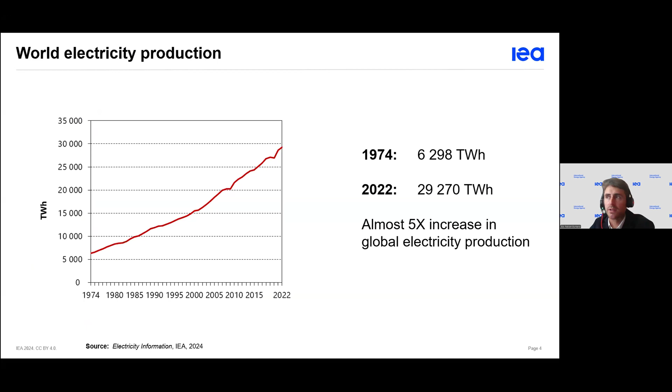Let's start with a small quiz where you can also answer in Menti. What is the main fuel used for electricity production in the world in 2022? For this, I invite you to go to Menti with the code 49411893 to answer this question. We have touched upon this topic already in some other presentations, and now I invite you to see what you have learned. What is the main fuel used for electricity production in the world in 2022? Natural gas, oil, solar and wind, coal, hydro, or biofuels?

I can see many answers coming in. Most are in favor of coal. There's also an answer for natural gas and hydro. The big majority thinks that coal was the main fuel used for electricity generation in 2022. I think we have a clear winner. It is coal. You can still start voting, but coal is the correct answer, still in 2022.

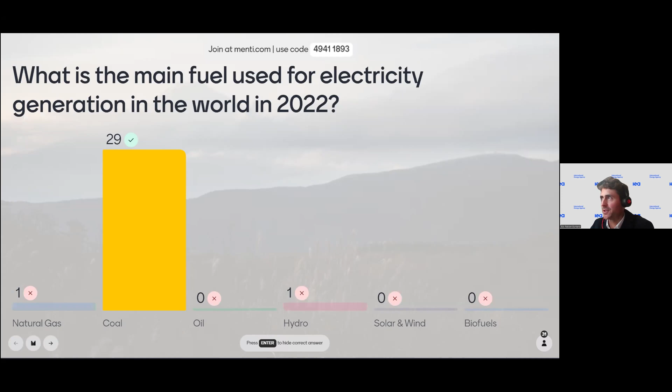Okay, so over this 50-year period almost, since 1974, the mix of fuels used to generate electricity changed. For instance, if we look at the share of electricity production from oil, shaded in dark blue, you will see that oil has fallen from about 25% of production in 1974 to around 3% now in 2022. Similarly, the share of hydro has fallen from about 23% to 17%, as many of the suitable large-scale sites have already been dammed. By contrast, the share of production from natural gas, shaded in light blue, has increased significantly, rising from about 12% to almost 24% of generation.

There's also been a noticeable increase in production from nuclear power, with the share rising from 4% in 1974 to 13% in 2010. However, since then, the share has declined slightly, in particular following the accident at Fukushima nuclear plant in 2011. During this time, you will notice that coal still remains the main fuel used for power generation, as we found out before, with its share changing little between 1974 and 2020. One of the reasons for coal's enduring popularity is still its cost advantages over other fuels.

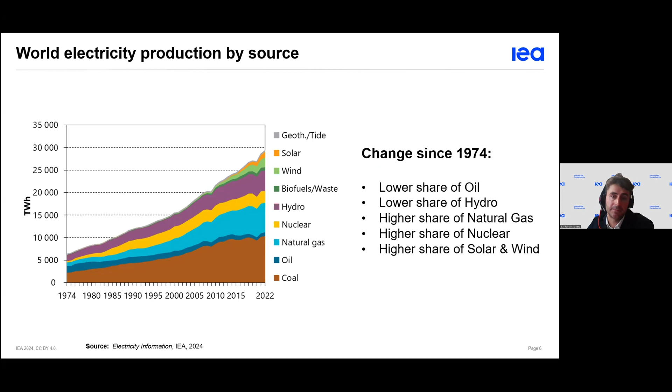However, on the emissions front, there's some good news. If you look at the share of electricity output from solar and wind, shaded in orange and light green, you will see that although the output from these renewable sources is still relatively small, their share has been steadily increasing in recent years as production costs have fallen. So in summary, compared with 1974, the electricity mix has a lower share of oil and hydro, a higher share of natural gas, nuclear, and solar and wind. The share of coal is still approximately constant.

Now let's look at the data for electricity generation in 2022. As mentioned, coal is the dominant fuel, followed by natural gas, which provides just on a quarter of total output. In total, almost two-thirds of all electricity production comes from combustible fuels, so coal, oil, gas, biofuels, waste. The remaining third is produced by non-emitting sources such as nuclear, hydro, solar, wind, but also geothermal. As mentioned, the share from solar and wind is still relatively small, but has been steadily growing over recent years, with the combined share of solar and wind now over three times that of oil.

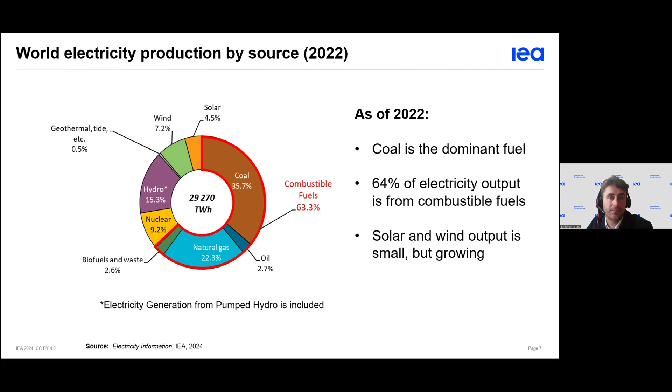Now let's look at the electricity production by region. Here you can see a graph of electricity production for the OECD and non-OECD countries. OECD is the dark black line, and all the other countries are shown here in different colors. As you can see, electricity production in non-OECD countries has grown much faster than in OECD countries over the past 20 years. As a result, production in non-OECD countries surpassed that of OECD countries in 2011.

Since then, the electricity production in non-OECD countries has continued to increase, while production in OECD countries has plateaued almost. As of 2022, non-OECD countries' share of production stands at around 60% compared with 28% in 1974. It's a similar graph, just with a line for the non-OECD countries here shown in red.

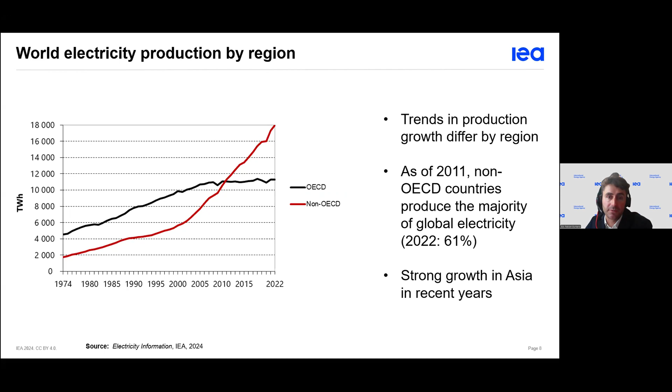Now, let's look at the electricity consumption by sector. Firstly, you will notice that consumption has increased almost fivefold, growing from 5,000 terawatt hours in 1974 to almost 25,000 terawatt hours in 2022. If you remember a few slides back, production has also increased almost fivefold, so it makes sense that consumption would increase by a similar amount.

However, the numbers are different. If you remember from the production graph, production was almost 30,000 terawatt hours, and here you can see it's 25,000 terawatt hours, not 30,000. The reason for that is the transmission and distribution losses and also the energy industry's own use.

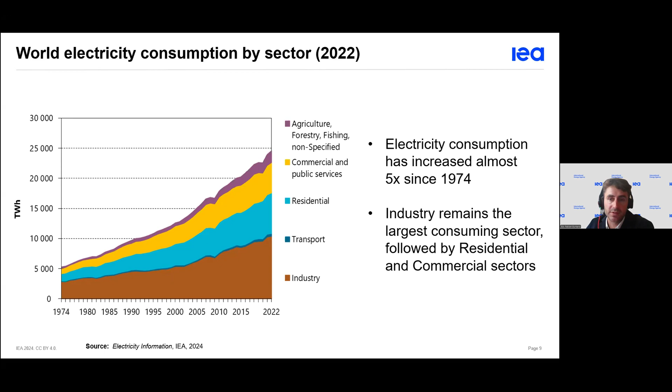Looking at the consumption sector, industry is the largest consuming sector. However, its share of consumption has declined over time as restructuring and improvements in energy efficiency, particularly in OECD countries, have seen electricity demand in industry rise at a lower rate than in other sectors. However, this is a graph for the world, and on the next slide you will see consumption patterns in OECD and non-OECD differ.

If we compare the sectoral consumption in the OECD on the left-hand side with the non-OECD countries on the right, we can see some differences. In the OECD, three sectors - industry, residential, and commercial and public services - each consume roughly around a third, 30 to 32%, of electricity demand. By contrast, in non-OECD countries as a whole, industry represents almost half of total electricity demand. There are many reasons for these differences: the structure of the respective economies, income levels, and others.

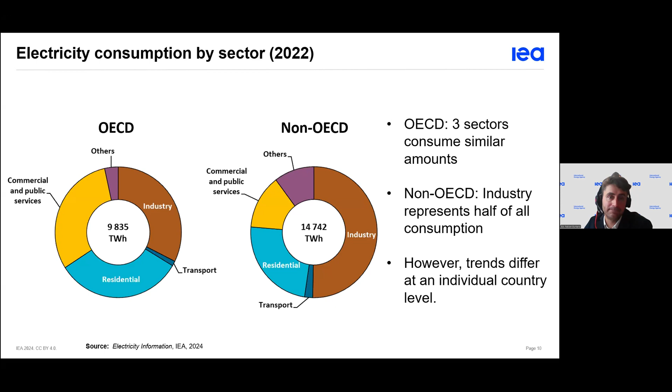However, of course, trends differ again at an individual country level. So that's it from the small history and the trends. Let's start with the concepts.

Firstly, let's look at the sources of electricity. Electricity is produced as both primary and secondary energy. Primary electricity is obtained from natural sources such as hydro, solar photovoltaic, and others. Secondary electricity is obtained from the heat generated by burning combustible fuels, from geothermal heat, and solar thermal heat.

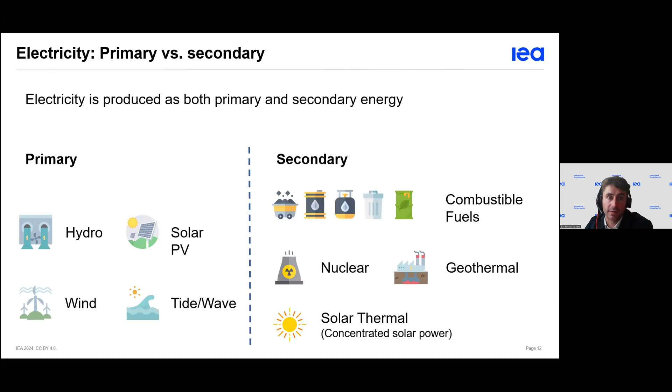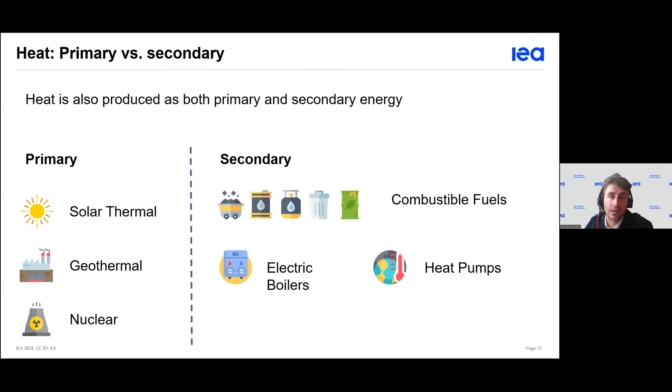Similarly, heat can be used as primary and secondary energy. Primary heat is obtained from natural sources such as solar thermal, geothermal, as well as from fission in nuclear reactors. Secondary heat is obtained by burning combustible fuels and from transforming electricity into heat in electric boilers, or by capturing it from low temperature sources using heat pumps, for instance.

Now, let's look at the producers. Electricity and heat producers can be divided into two broad categories: main activity producers and auto producers. Main activity producers generate electricity and heat for third parties as their primary activity. The main purpose of the facility is to generate electricity or heat. For instance, a nuclear power plant is a good example of a main activity producer.

By contrast, auto producers generate electricity or heat only as a secondary activity in support of the primary activity. For instance, a large chemical manufacturing facility may have an on-site power plant to generate electricity and heat, which is used in the production process. Some of this electricity and heat may also be sold. However, the main purpose of the facility is to produce chemicals, not to produce electricity and heat. Therefore, this would be classified as an auto producer.

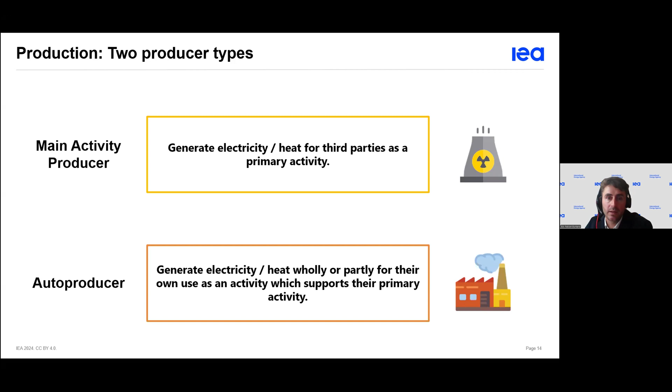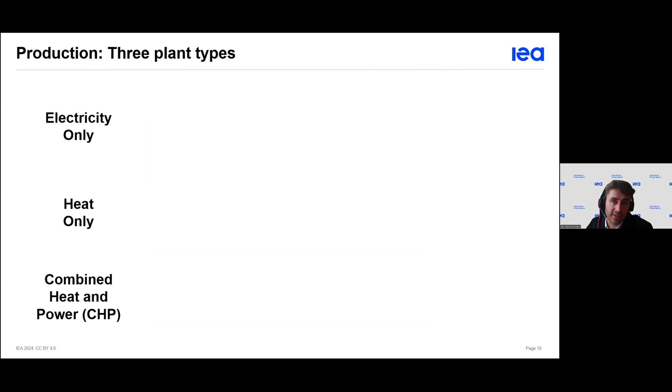Now, let's look at the plant types. Electricity and heat producers can be further distinguished by the type of plant that is operating. There are three categories: electricity-only plants, which only produce electricity; heat-only plants, which only produce heat; and combined heat and power plants, also named CHP plants, which can generate both electricity and heat in a combined process. This is also known as cogeneration.

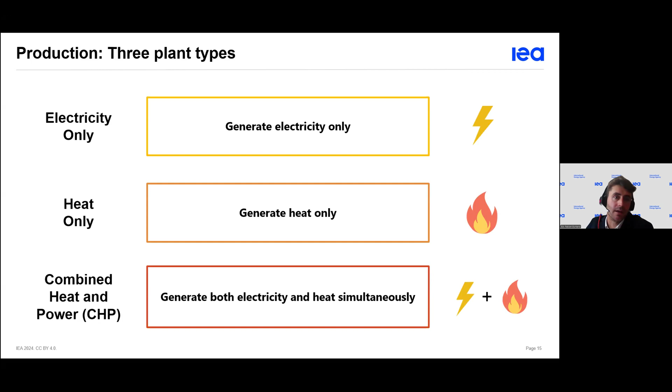Some more reporting conventions now used in the reporting of electricity and heat statistics. For main activity producers, the convention is very simple: all production of electricity and heat is reported. However, for auto producers, there are some specific conventions for heat. This is because auto producers are also industrial consumers that use fuel to power their processes.

For auto producers, all electricity is reported in the electricity and heat questionnaire. However, only the amounts of heat sold are reported; amounts of heat generated for own use on-site are not reported. Similarly, when reporting the associated fuel inputs to electricity and heat production, for heat, only the amounts of fuel input associated with heat sold are reported.

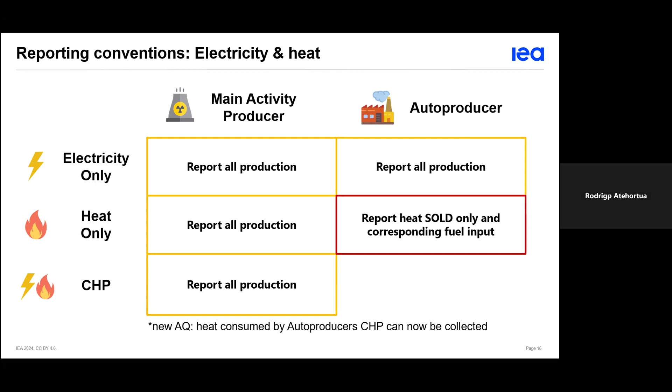A small note on that: for the new annual questionnaire, auto-consumed heat by auto producer CHP can now be collected.

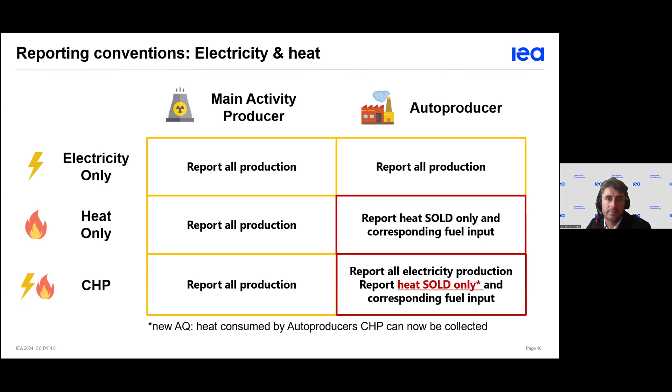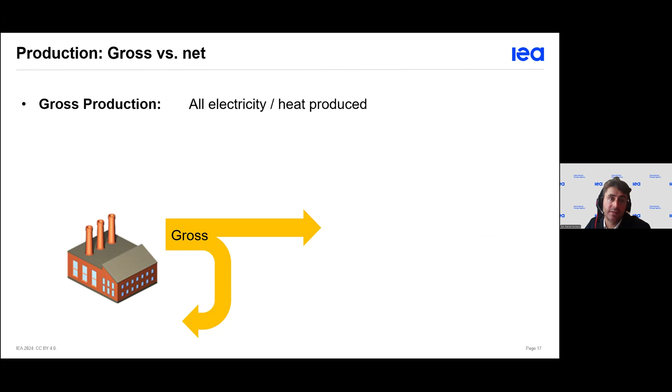Another important concept is the distinction between gross and net production. Gross production refers to the total output of electricity or heat generated in a facility before any is used. However, not all of this is used for productive purposes beyond the power plant. Some of the electricity and heat generated is used on-site for lighting, heating, or to support plant operations. This is referred to as own use.

The remainder left over after subtracting the own use is the net production. However, remember that for auto producers, production only refers to heat sold. Which brings us to the next concept: the convention for reporting of own use data.

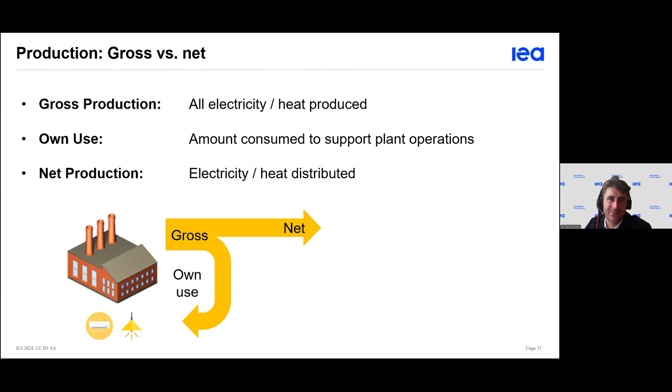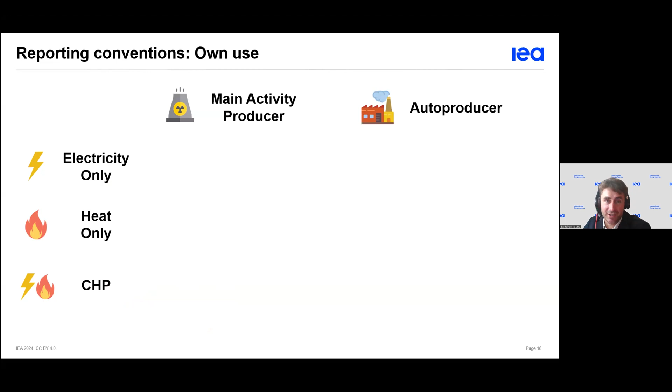If you recall, for autoproducers, we only report the amount of heat sold, not the total heat production. Therefore, we cannot report the total amount of heat used for own use, as this would not align with the reported production figures. So we need to make an assumption.

For main activity producers and for all production of electricity, the situation is simple: net production equals gross production minus own use, as described on the previous slide. However, for auto production of heat, we assume that gross production equals net production and there is no own use. This is because for auto production of heat, it's difficult to distinguish between heat used for own use and that used simply for plant operations. I hope this was clear.

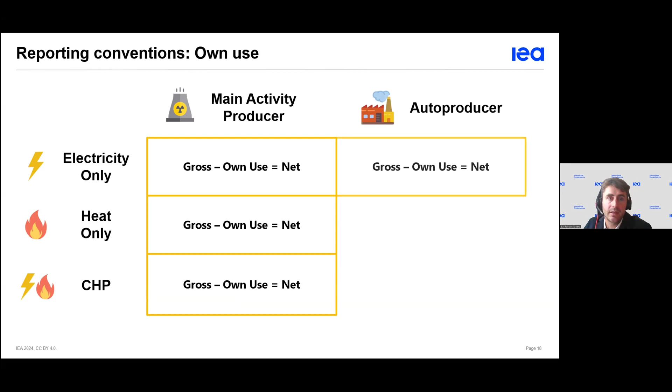Also, to recap: for heat produced by autoproducers, there are slightly different reporting conventions. We only report heat sold, and we assume that gross equals net.

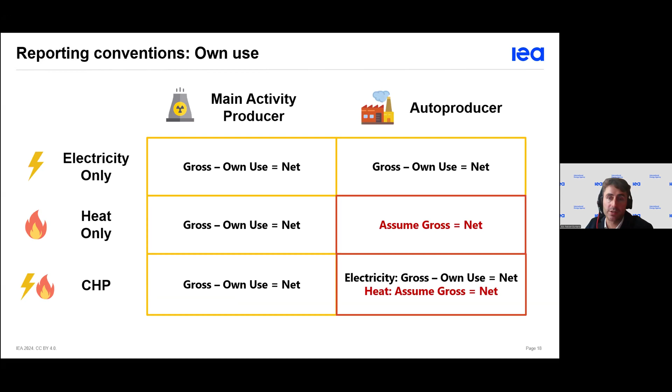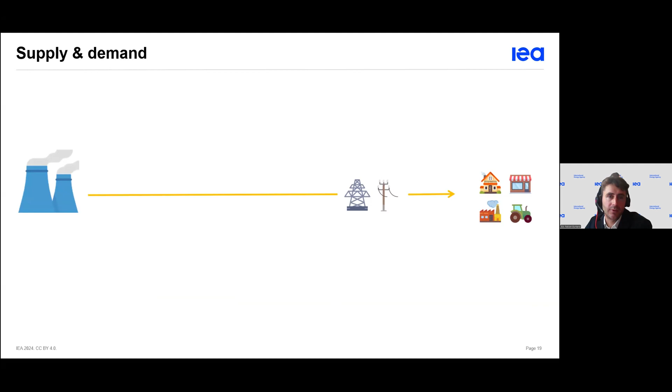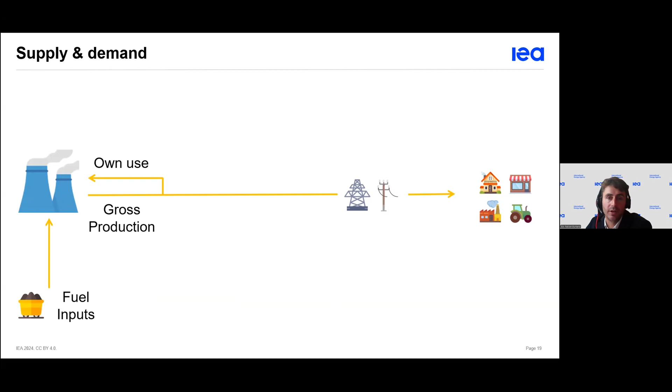Now that we've covered the tricky part of the presentation, let's move on to the electricity and heat supply chain and some of the data we collect in our questionnaire. In terms of supply, we collect fuel inputs to electricity and heat generation, gross production, own use, net production. In addition, we also collect data on electricity used for pumped storage hydro and for electric boilers and heat pumps where the heat output is sold.

And finally, on the supply side, we also collect data on trade. So with this data, you have the supply side of the electricity balance. In between the supply and consumption, the electricity travels along cables where some losses occur, and this data is also collected in the questionnaire. Finally, we have the end users, so we collect data on consumption across the consuming sectors such as industry, transport, residential.

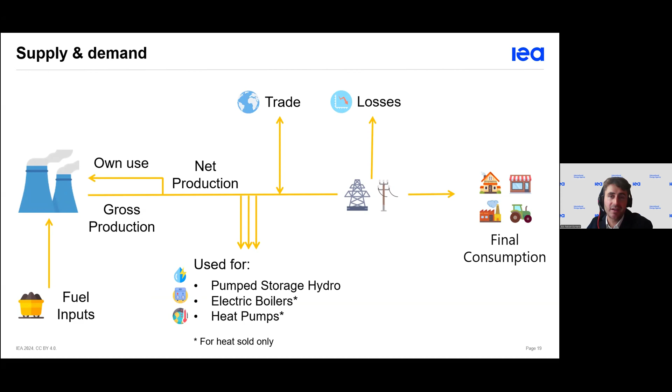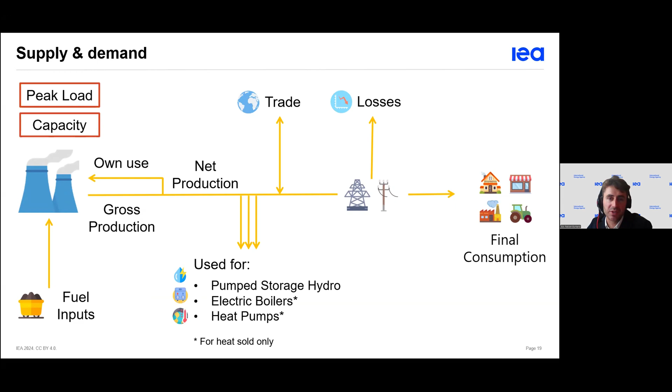So in theory, the difference between supply and final consumption figures should just be losses. However, sometimes in reality, there may also be some statistical differences. Finally, we also collect data such as peak load and capacity data, which can be useful for other electricity analysis.

Losses on the lower end of the scale are observed in more advanced, compact, and well-maintained grids, and higher losses are observed in older and more distributed grids, where there's a higher rate of meter bypassing, such as theft. Globally, transmission and distribution losses represent around 7% of the total gross production, and energy industry own use represents a further 9%. So in total, around 16% of the total gross production, a sizable amount in my opinion, is lost or used outside of the final consuming sectors.

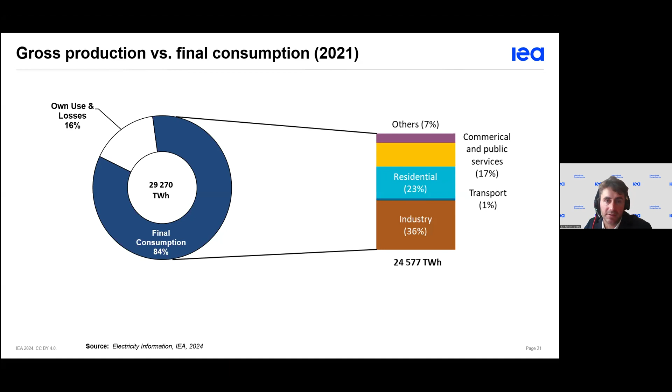Let's look at another important concept and also a useful check related to the electricity supply, which is generation efficiency. We've talked a lot about efficiency; here a bit more in detail about efficiency for electricity and heat. It is calculated as the total gross energy produced by a plant divided by the energy content of the fuel used to produce it. So again, energy out divided by energy in.

According to the first law of thermodynamics, energy cannot be created or destroyed. Therefore, the efficiency must be less than 100%. The expected efficiency will vary depending on the fuel and technology. For instance, combined cycle gas turbines would be expected to be more efficient than simple coal power plants. The efficiency must be calculated using energy units, and you must use the same units for inputs and outputs.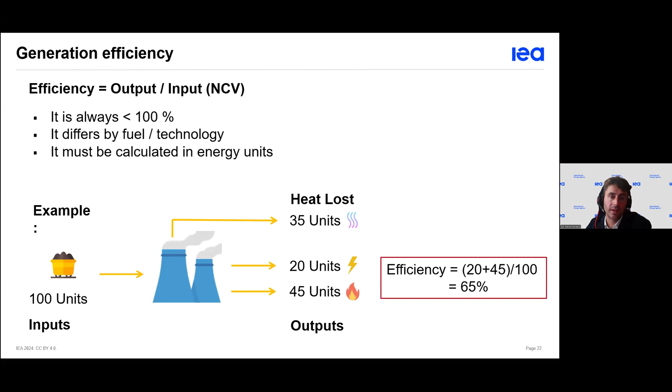Moving on to another reporting convention for trade. Unlike with other fuels, and this is really unique here, trade of electricity and heat is reported on the basis of borders crossed, not origin and destination. In addition, reported imports and exports include amounts in transit.

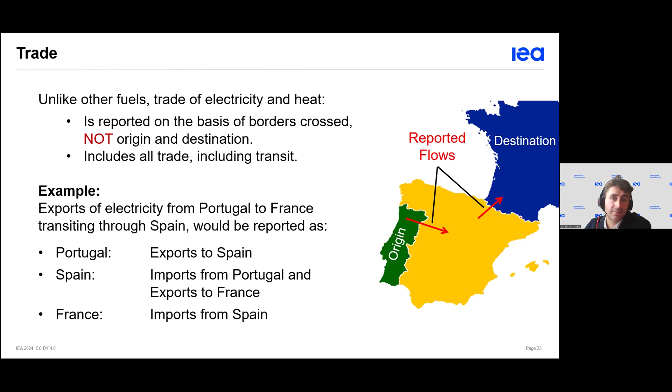For example, if Portugal were to export electricity to France through Spain, since France and Portugal do not share a common border, they would not report trade with each other, but with Spain. Portugal would report exports to Spain. Spain would report imports from Portugal and exports to France. France would only report imports from Spain. So Portugal and France would not report trade with each other. This differs from the conventions used for other fuels.

One more small concept in electricity statistics worth knowing is the difference between energy and power. Simply put, power is the rate at which energy is used, so power is energy divided by time. Power is measured in watts, and energy is measured in joules. However, the numbers for joules become quite high quite soon, which is why we usually use watt hours to refer to energy. So this is an important distinction: watt refers to power, and watt hours to energy.

In addition to production, consumption, and trade data, the electricity questionnaire also captures data on power plant capacities, specifically net maximum capacities. Net maximum capacity is simply the maximum power output that a power plant can produce, with all units running at full blast, on the 31st of December of the reporting year. These are very useful data for analysts. They can also be useful for statisticians when checking the data, as we can compare reported production values with maximum potential production values, so we can check if the data makes sense.

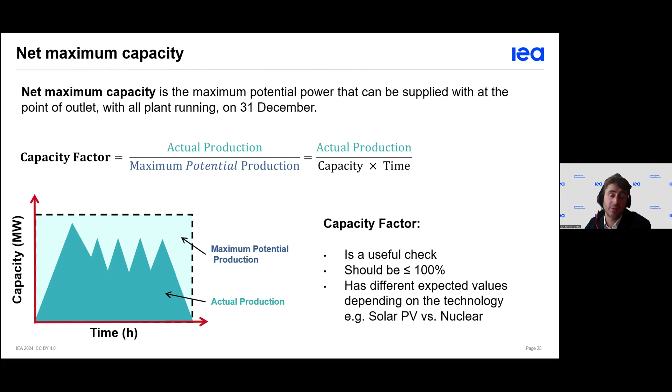Actual production divided by potential production is called the capacity factor. It should be less than 100%, except if there were plant closures near the end of the year, in which case the figures may be distorted. There are also different expected values depending on technology. For instance, nuclear plants are expensive to build and therefore typically run as much as possible, whereas solar PV, which does not run at night and is both weather and location dependent, will have a lower capacity factor. So as statisticians, we can use both historical and expected capacity factors to check data.

Just a few comments on the data collection, and then I will almost close the presentation and open the floor for questions.

With all statistics, data collection has costs in terms of time and money, but also opportunity costs. Therefore, a balance must be struck between available resources and needs. That said, not having the proper information available for informed decision-making can lead to higher costs.

In terms of specific challenges for electricity statistics, the liberalization of electricity markets has had a big impact. Previously, there were monopolies, and all the electricity data could be gathered from one company, but now data needs to be gathered from many different companies, some big, some small. In addition, competition leads companies to be reluctant to provide data, creating confidentiality issues, which can impact data coverage and comprehensiveness.

Okay, and with this, I will close my presentation and open the floor for any questions.